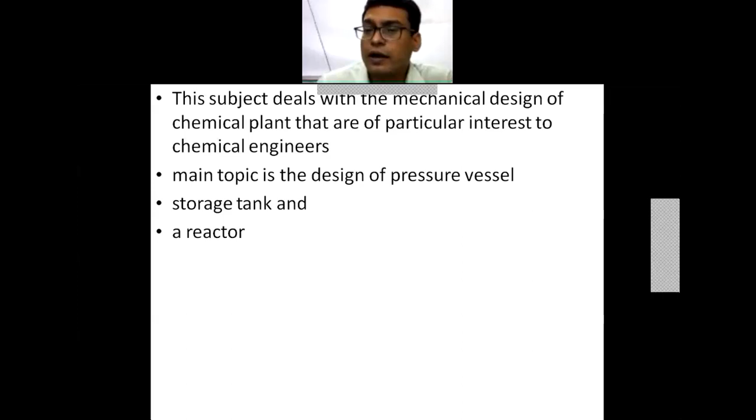This again varies from country to country, and there is no specific definition of what one can call vessels. But more than 15 centimeter diameter and more than atmospheric pressure can be considered as a pressure vessel. So this subject deals with the mechanical design of a chemical plant. The chemical engineers or technologists will not usually be called on to undertake the detailed mechanical design of a pressure vessel. This is my statement related to this subject.

Then what should a chemical engineer do if he is not going to study the detailed mechanical design? It's an interlink between a mechanical engineer and a chemical engineer. A chemical engineer has more focus on heat transfer, mass transfer, and reactor design aspects, and a mechanical engineer gives you the vessels or units which can be used for the production of these chemical products. So one has to understand the mechanical as well as the chemical aspects, and that is why this subject is a link between a chemical engineer and a mechanical engineer.

If you want to become a successful engineer, a successful production engineer, then this subject is very much essential. If you want to go into the details of design, this subject is also very much essential. But as it incorporates different formulas coming directly from mechanical engineering or the strength of materials, people don't try to go into the details of this subject. But for a production engineer and a design engineer, this subject is very much essential because it talks of the mechanical engineering aspects as well as the chemical engineering aspects.

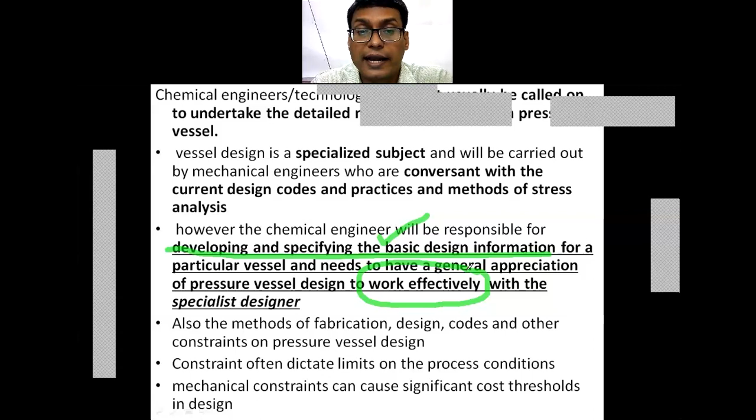So also the methods of fabrication one has to know. One has to know the different design procedures, codes and other constraints on pressure vessel design. Then these constraints, these limitations limit the process conditions. Process conditions को limitations आते हैं because of certain constraints. सारी ही चीजें सारे वक्त available नहीं रहती, but if available, then at what cost? The cost factor is also going to be there. So how much cost I am going to invest, and on what constraints I have to compromise. That has to be decided.

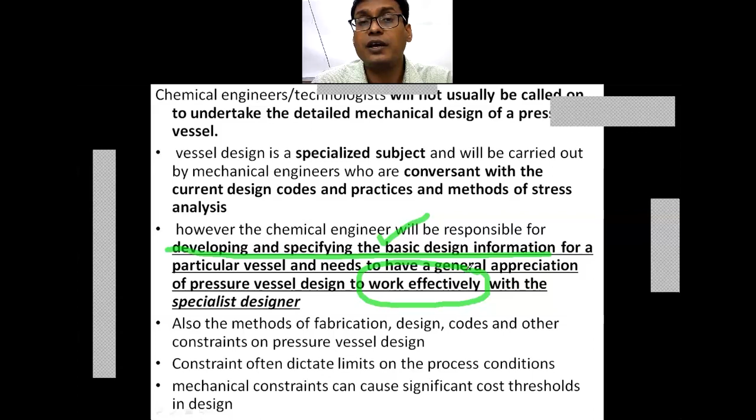It's a decision-making process. So mechanical constraints can cause a significant cost threshold in the design. So all these constraints, mechanical constraints, civil constraints, then your instrumentation, electronics, you can get, but at what cost you are going to access all these facilities? There is nothing like that. You can get it, but at what cost? So one has to compromise depending on the cost considerations.

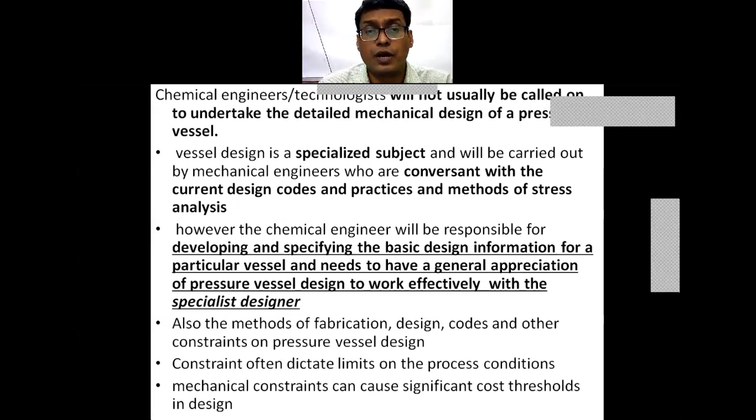So what is the basic data that is required by the specialist designers? The specialist designers who design, who fabricate our equipment. So what basic data is needed, and this basic data is to be provided by a chemical technologist to the mechanical engineer.

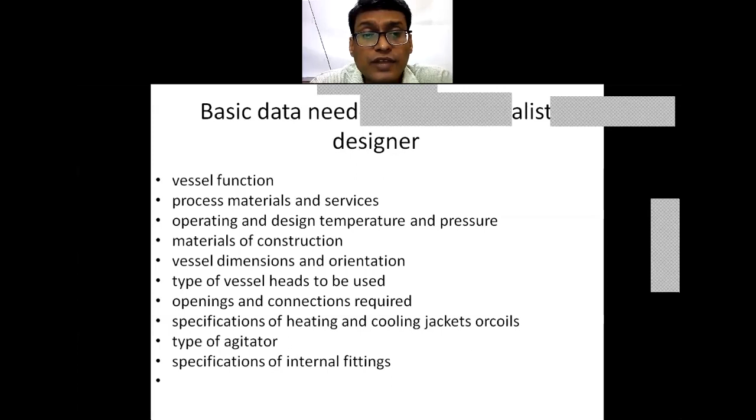Then the type of the vessel heads to be used. Is it an elliptical head? Is it a torispherical head, or is it a conical head, or is it semi-hemispherical? The different types of the heads and the different openings and connections required with that. Then the specifications of heating and cooling jackets or coils. For heating purposes, whether I am using a jacket or whether I am using the coils. So these are to be taken into account, and accordingly the fabrication has to be done.

Then the type of the agitators. This is mostly talked about for your reaction vessels. We are not going into more details of any other equipment than the reaction vessels. That is why we are restricting here to the agitators. Then the specifications of the internal fittings. This incorporates the detailing of the other equipments.

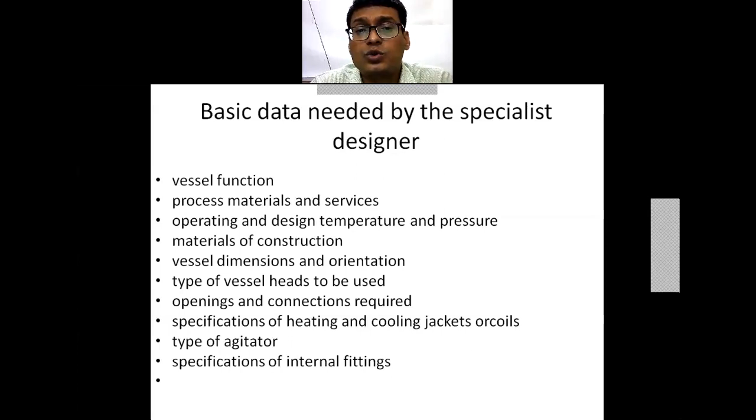When you talk about the distillation column, is it a plate type distillation? If it is a plate type distillation, then what will be the dimensions of the plate? What should be the thickness of a plate? What are the different holes? Is it a sieve type tray or is it a valve type tray? Then how much will be the height of a downcomer? How much will be the height of a weir? Then how to assemble the manhole? All these specifications of internals related to the different equipments have to be taken into account. So in this subject we are mostly talking about pressure vessels, specifically reactors.

Then an elementary understanding of pressure vessel design is needed in the preliminary stages of the design. Generally, there are different correlations available for the cost of a vessel. Now, all these are based on the weight of material that is required. Whenever you go into the market and try to fabricate any vessel, that is based on the weight of the metal that is required.

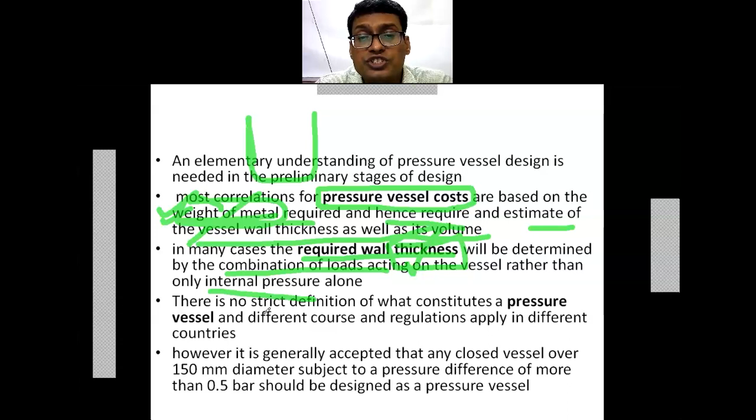So in many cases the required wall thickness is needed. The calculation of the wall thickness, which is the most important consideration in this subject of chemical equipment design, will be determined by the combination of different loads acting on the vessel and the internal pressure required. So it does not only depend on the internal pressure, but also on the different accessories or attachments. There is no strict definition of what constitutes a pressure vessel and how it is regulated. It is not possible to give a complete comprehensive account of vessel design. The design methods and data given should be sufficient for preliminary design.

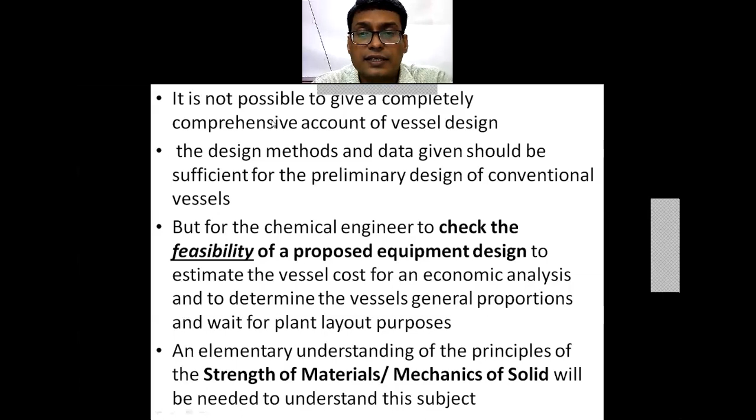But for a chemical engineer, checking the feasibility of a proposed equipment design is the basic responsibility: whether his process equipment will be feasible and give the desired results or not. This is the main role of a chemical technologist in the process equipment design subject. An elementary understanding of the principles of strength of materials and mechanics of solids will be needed to understand this subject. So this is the basic requirement.